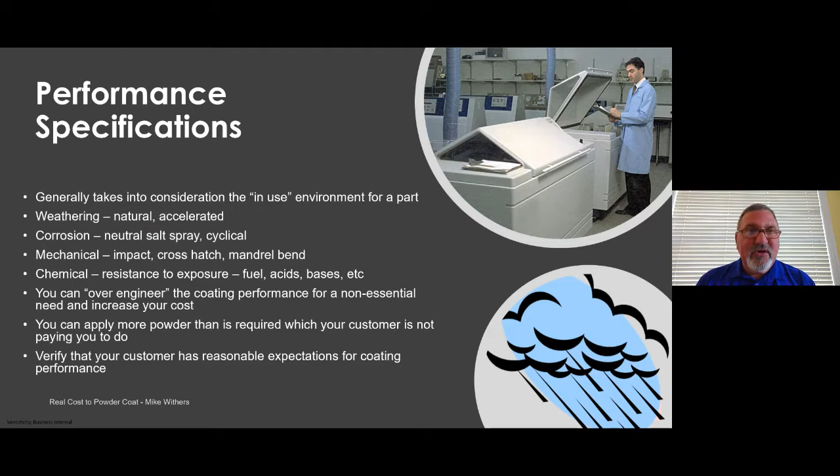The other thing is an open communication dialogue between you and your customer for reasonable expectations for coating performance. That's going to significantly impact what you have for rework. And so if you have boundary standards with a customer, and the customer says, hey, this many defects is okay, but this many is too much, now you and your team have the opportunity to determine which are good products the first time through and which products are going to require rework. And if that's a reasonable expectation and both parties have agreed to it, then obviously there is a way you can save on cost.

Now I'm going to talk briefly about some of the chemistries that are involved, and some of you probably know this all very well. This may be new to some of you, but epoxies and hybrids are for indoor use only. They're not stable in UV exposure. They have the best corrosion properties, and a lot of that is because of how they cross-link, but they're often used as a primer.

And so there will be a polyester top coat that will be applied to it if it's going to be something that's going to go outside. As I said, they have excellent chemical resistance, excellent hardness and mar resistance. They have excellent post-forming properties, and they have low cure and low film build available. So you can go under 1 mil if you need to go under 1 mil, or you can have a very smooth film as well.

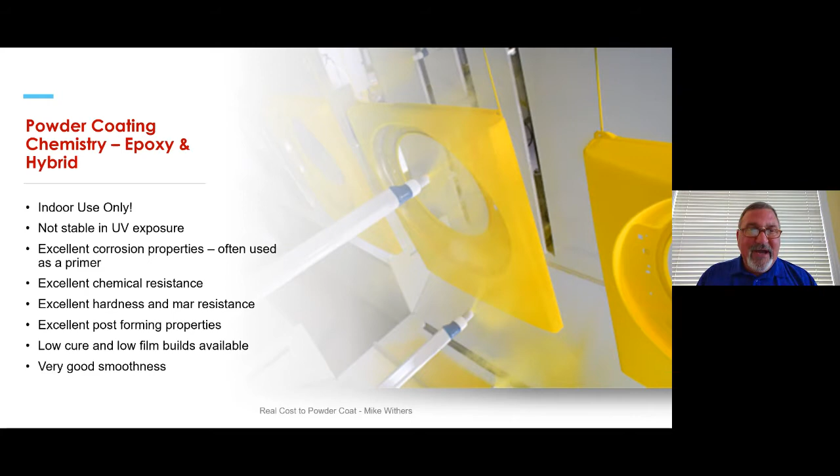The other opportunity with epoxies and hybrids is that you've got the full range of gloss, and so you could go from a dead zero gloss all the way up to a 90+ gloss. The next products I'm going to talk about are polyester TGICs, HAAs, urethanes, and then we're going to get into super durable.

So polyester is the backbone resin. For thermoset products, we have to have a curing agent, and the curing agent in TGIC is the TGIC. It is a mutagen, and so in other parts of the world, they have stopped using polyester TGIC products. In the US, it is still being used. In fact, it is probably the most used.

It is the workhorse. But also, because it can go indoor or outdoor, it gives it a lot of flexibility. It can be applied at higher film builds. It's got good weathering properties. It's got good corrosion resistance and flexibility and smoothness.

For the HAA curing component, you'll hear that referred to as non-TGIC or TGIC free, or just simply as a polyester HAA. They're more environmentally friendly. The curing agent only releases water, and they can also be applied at higher film builds. Initially, you could not do that, but there have been recent advances in the last couple of years where you can apply at a higher film build.

They have excellent charging properties, and so if you're typically using a TGIC polyester and you make a conversion to an HAA, then you're typically going to have to turn down gun settings because they have such excellent charging properties. So that means wrap around the part and then Faraday cage penetration. They too have good weathering. They have good corrosion resistance. They have good flexibility, and they have good smoothness.

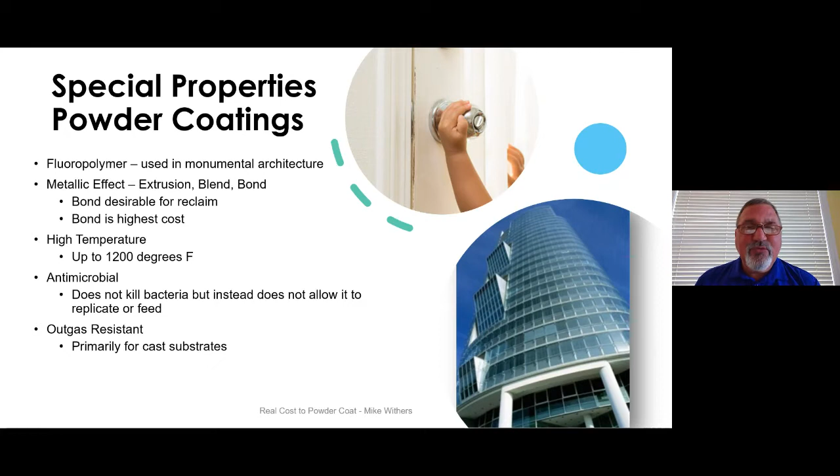Outgas resistance, that is something that really can impact your cost. Especially nowadays, castings have a lot of recycled metals in them. And even the process of creating the casting will trap gases down into the cast component you're trying to paint. And those gases like to come out at the temperature we like to cure powder. So you get pinholes, and then you have to go back and rework those oftentimes. We can build into a formula outgas resistance to help with that. So you wouldn't use an outgas resistant product unless you have a substrate that is subject to outgassing.

Briefly, we're going to talk about the weathering performance. This is where that super durable really starts to take effect. It's the middle graph on both sides. First one is gloss. You can see a standard polyester that's exposed in South Florida, and this is natural exposure, that's our most harsh environment in the United States. In fact, it's one of the harsher environments in the world. So many other countries send products here to be tested in South Florida as well.

Now, if you think of an in-use service of a product that is not going to be in South Florida, say if you're north of the Mason-Dixon line, then those products see significantly less UV exposure. So would you need a super durable product if you are not getting the intense UV exposure that you get down in Florida? Now, if you've got products being shipped all over the country, you pretty much have to go that route because you are going to be exposed to it at some point in time.

On the other side is the color variation, and that's typically measured in what's called delta E, and all that really is a measurement of one color position to another color position over time. And so we're exposed to the outdoors. You can see the one, and after 2 years it shifts about 2.5 color units.

The middle one is just over 1.5, and the last one, which is the fluoropolymer over there, you can see it's very stable. Back to the gloss side, you can see the same thing, that the fluoropolymer is the one that retains its gloss significantly well even after 10 years of exposure.

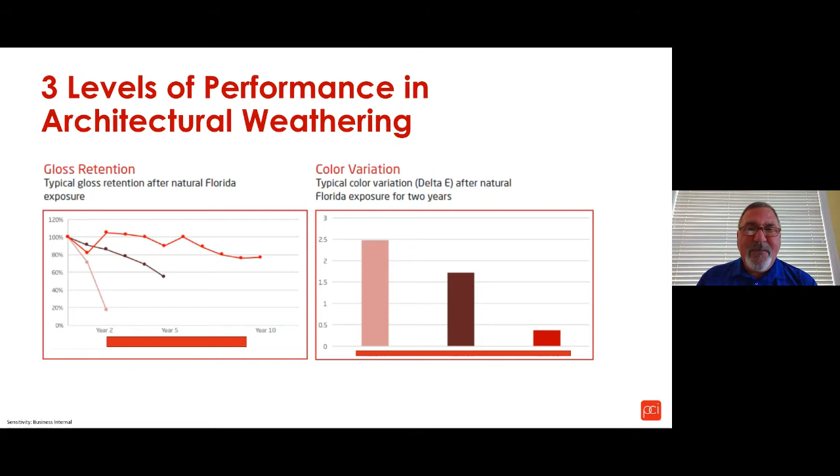I'm not going to read through it, but it's good to know what the background is, because what we actually have is a calculator, and we're going to access that on the Powder Coating Institute website here shortly. And so let me go back and talk about formulation a little bit.

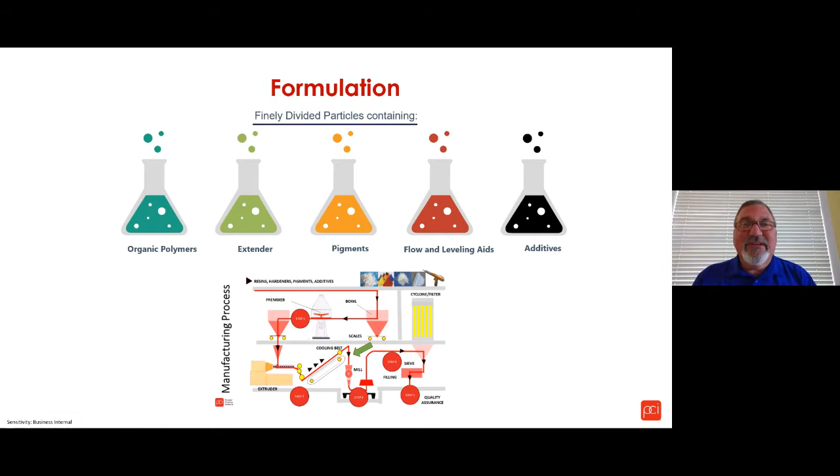The premixer is then turned back upright, and it goes through an extrusion process. And you can see the extruder there. I know it's kind of small, but hopefully you can see it. We'll also do a check there for quality. As it comes out of the extruder, it's a hot melted product. It hits some pinch rollers that are cooling it, spreading it out into a sheet, and it goes down a cooling belt. And then it goes into a grinder. We do a check there. It goes through a sieve, and then it goes into boxes. And so that's the process for making powder if you did not have exposure to seeing that process previously.

So why do I say all that? I say all that because of specific gravity. On your TDS from every supplier is going to be listed the specific gravity of the product that you're buying. And so a formulation can have more or less extender in it, and extenders are typically in all formulas. They do have a purpose in formulas at times as well, but extenders do not charge well like resins do. And so if you use more extender in a formula, you can typically reduce the overall cost of the powder coating. But what you are impacting negatively is the sprayability of the product.

And we'll talk more about this, but it's going to be harder for the sprayer. Whoever's on the gun, they're going to say, I really have to work to get the powder to stick to these parts. And so oftentimes you go look to see if you've got a ground issue, and it's not a ground issue.

And then they said, but this other powder will jump on a part. And so what that is an indication of is that you've got a lower specific gravity formulation, in that case most likely. Now there are some colors that require more pigment than other formulations, and so you're going to see higher specific gravities for a white, for example, than you will typically for a black.

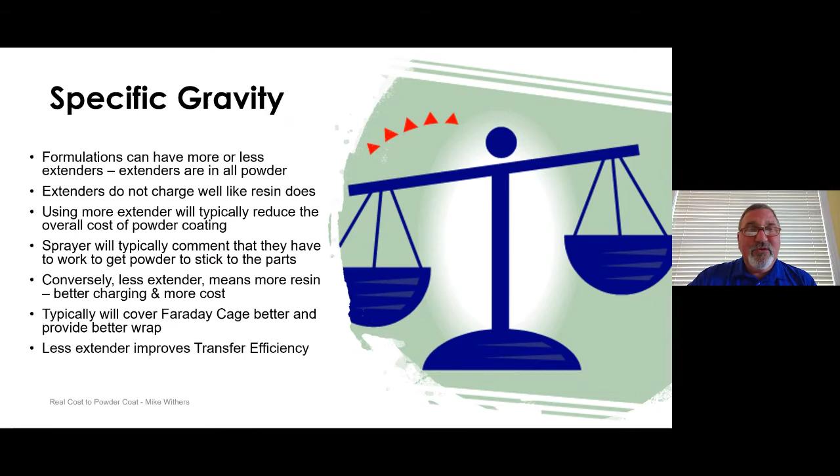But conversely, less extender in a formula means a more resin-rich formulation. It's got better charging, but it does increase cost. And so this specific gravity component is going to go into a formula we're going to talk about, but actually, with that formulation, a resin-rich product, you typically do get better Faraday cage penetration and provide better wrap. And then less extender improves the transfer efficiency. So all of these things that are impacted in that formula you saw just briefly are impacted by specific gravity.

We talked about throwing it away. If you spray to waste, you're discarding powder. A good ground is key to a good transfer efficiency, and gun settings play a key role. Do a simple math here. If you go from a 40% up to a 60% because you do some things and have an impact on how you spray, then obviously you've got an opportunity. If you spend $100,000 a year in powder, then you got an opportunity to save $20,000. Just by changing how you do things, you can put $20,000 back in your company.

The next thing we're going to do, we're going to actually go through an example. So I want to give you a real world example. Oftentimes, if you're in your office and someone comes in and says, hey, I've got a product here I can sell you. This is a 1.6 specific gravity. It's $3 a pound. Okay, well, is that good or is that bad? And so what we're going to go through is an example here where, let's say you got a really good system. You're getting about 70% transfer efficiency.

And we're going to go to the PCI website now and kind of go through the process. And the reason I want to do this is because, when you're in your office, you've got the ability to go back to the website and use this calculator yourself. And I will say this: you are able to also download the app. And so the app itself, you could download to a smartphone, and you can do the calculation anywhere out on the floor if you desire.

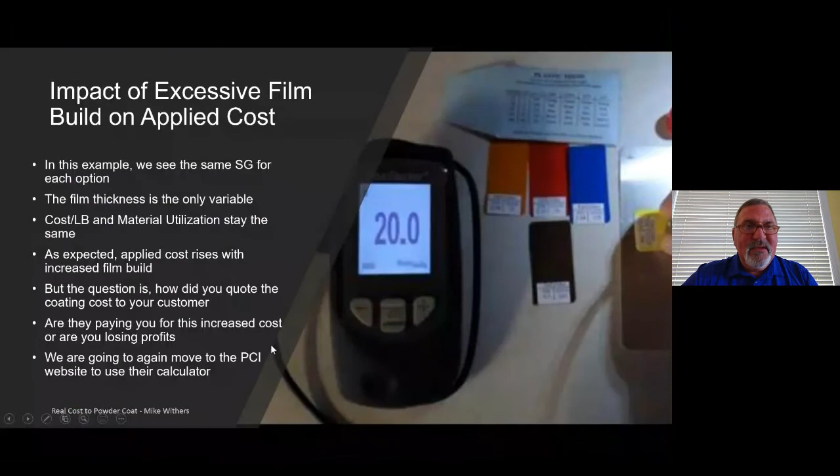If you have to break out of a product because you run out of paint and have to wait and order more, now you haven't delivered the customers the parts when they asked for them or expected them, and you're having to do a color change in the process, which is going to add cost to you as well. Jump back over to the other screen. So you got to see how the applied cost has an impact.

And so even just doing simple math, and this is probably a high number, but recent advancements in the industry are producing these non-contact film thickness gauges. If you're at the PCI Tech Conference, or any other conference where you get to see this measurement equipment, or attending a training class once we start in-person training again, you'll have an opportunity to see these. But these are getting better every day.

And so if you have a job shop and or a coating operation and you're spending $300,000 a year, if you're putting on 3.5 and you could be putting on 2.5, that's a mil too much, or that's 40%.

40% of 300,000 a year is a potential savings of 120,000. So now, is that a good investment? And the reason I put this on here is there's been many times I've been to customers and working with them that aren't using a film thickness gauge, and you try to show them the benefits of doing that. And I've often gotten the feedback that says, "Oh, that's too expensive. I can't afford that." My argument to that was based on this: you can't afford not to use this. The payback on this is so short that it makes so much sense.

The other advantage of using lower film thickness: as you increase film thickness, especially if you get significantly thicker, you start to negatively impact the mechanical properties of coatings. And so you don't want to do that as well. You don't want parts chipping off as they bang into each other or as they bolt up.

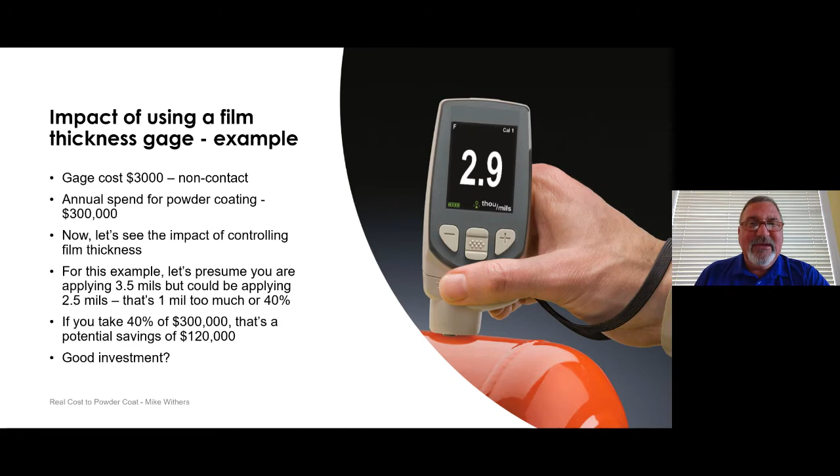So one of the other subjects I want to talk about is line density. I've been in many facilities where you see a conveyorized line and you see one part on one hook, and then you see some distance between them, and then another part on another hook. And these parts typically aren't that large. And we talk about the window of opportunity, and if you've been to training classes, you'll hear that term used. How many parts can you fit into that window of opportunity?

So with the guns that you have, with the line speed that you have, do you have manual touch up? You want to maximize the number of parts that are in that space. If you had one part per hook, in this example I'm showing 8 parts per 12 feet of conveyor, 8 parts per minute, and 3,840 parts per 8-hour shift. But if you hang one above the other, now you can double the number of parts in an 8-hour shift. You can also double your revenue. And the other benefit is that you've got the opportunity to move on to another color. I think I get into that on the next. Yeah, it does. Okay, so let me get into that.

Increasing line density increases first pass transfer efficiency. If you are spraying paint into air, even if you're reclaiming, but especially if you're not reclaiming, you are wasting money. You want that powder cloud hitting as many parts as possible. Increasing transfer efficiency lowers the applied cost. We've already seen that; I showed you the example of a 70% transfer efficiency to a 95% transfer efficiency. If you increase line density, you can move on to another part faster, so you can get more customers. You can change colors for the customer that you have. All of this increases your throughput in your facility.

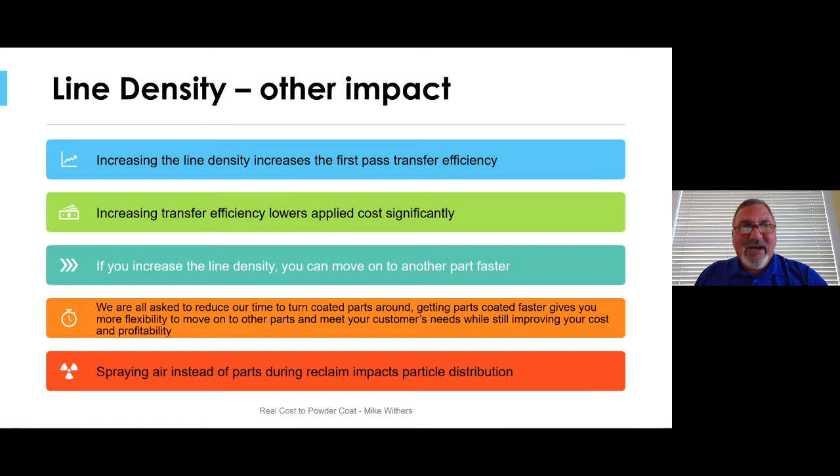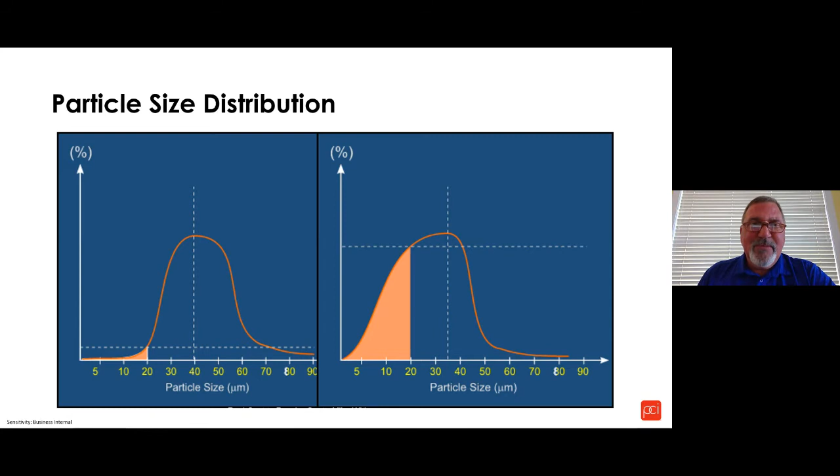Another way to really look at how do you reduce your cost is to be able to measure what is going wrong in your process. And so you have to look at defects. What are the defects? And then understand, okay, well, what kind of rework is involved in that defect?

So if it's a light spray product and the powder is able to be resprayed, in other words, you're going to get good intercoat adhesion without doing anything to it. You basically pull the part off the line and you put it back on the line, paint it again, as long as you're in that color. Now you got to add in the cost of doing the color change if you have to go back and do it later. But here's your opportunity now.

Many companies in my experience do a really good job of measuring, okay, well, these are the reworks we had, but what we don't measure oftentimes is the cost of the rework. And so if you are having to go back in and scuff parts, if you have to burn off parts, if you have to send them out for chemical strip, if you start to document all those costs and then start to look at what is causing the defect, if you attack the ones that are occurring the most by turning on and turning off the defect by figuring out the root cause, then you're able to significantly impact the cost to coat.

And I'll just give you a brief example. So I was working with a customer many years ago, and the customer understood their cost to coat and told me what they use. Let's just use an example of $3.75 a pound and 100,000 pounds a year. So they think their cost is $375,000 a year to paint. Doing an audit process, we determined that they had about 10% rework, and these reworks had to go through a shot blaster. So their cost to rework was significantly higher.

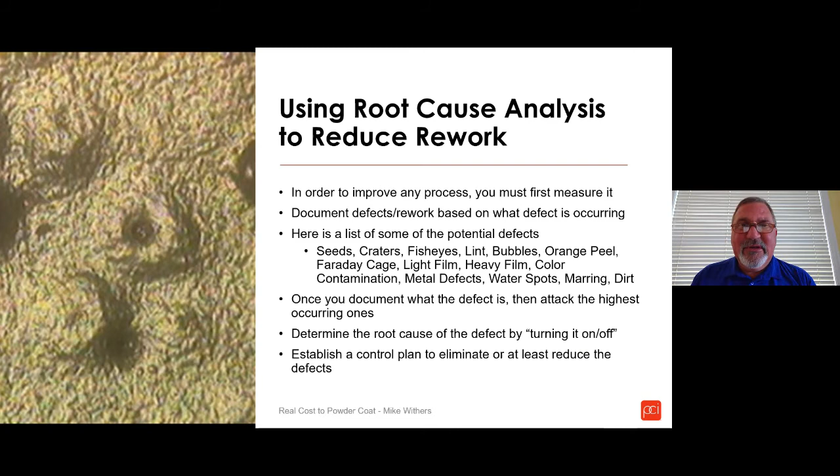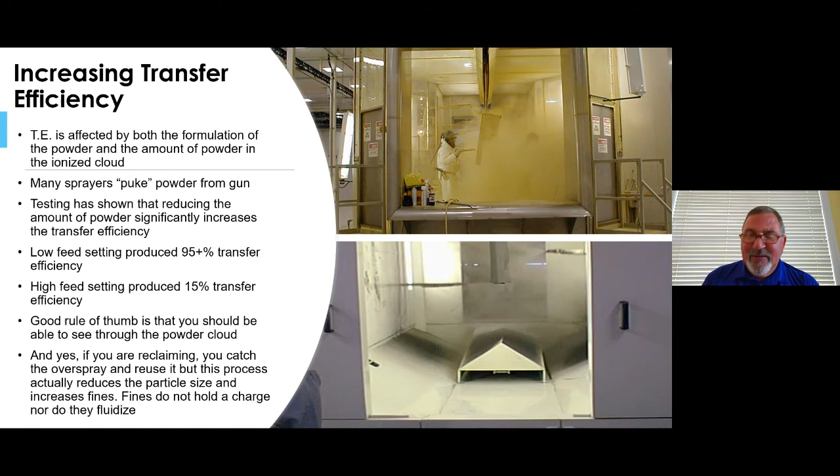Reducing the amount of powder coming out of the guns really significantly impacts the ability to get a higher transfer efficiency. And you can see there that the low feed setting in our laboratory testing showed that we could get 95% plus transfer efficiency. When we turned the feed pressure all the way up, it was about 15%. So in our case, 15% of the powder was on the part. The other 85% was on the floor. So you should be able to see through a cloud. And if you are reclaiming, a lot of people say, well, it doesn't matter, I'm reclaiming. Well, we saw what happens to particle size when that happens, and that impacts your sprayability as well.

Keys to improvement. Treat your paint and pretreatment suppliers as partners. They are experts in their fields. They can help you and want to help you to have the lowest cost. It's in their long-term interest to help you be successful. They can help you with training. Coming out of this crisis situation, there may be different people working in different jobs, and they may or may not have training in those jobs.

So I would encourage you to have a trained person. It's not only important to know how to do a job, but it's also important to know why you're doing what you're doing, and what happens if you don't do the tasks that you're supposed to do. Because oftentimes they don't understand the impact of not checking something that they're supposed to check. And so I oftentimes argue, who's the key person in your shop impacting your customer's perception of your performance? Well, that's the person on the application gun. Provide training. They control so much of your profitability, your first pass good. All of that is a reflection of how well they know how to do their job.

Reduce non-productive time. So if you've got long gaps in your line, if you've got lots of line stops, find out why. Why are you having line stops? Is it they're not able to hang parts effectively? Is it they're not able to remove parts effectively because they're still too hot? Look at all those things and then see if you can attack a way to have less non-productive time.